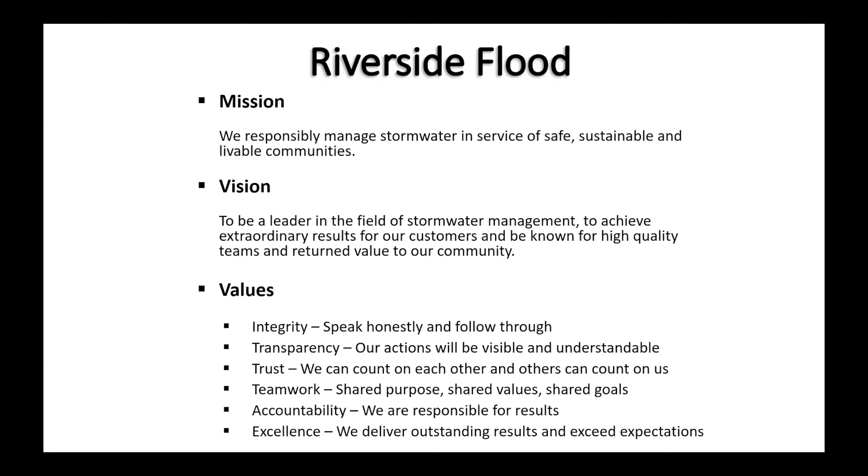And so just a little bit about our district. We were formed in 1945 after the floods of 1938. I'll show some pictures of those in a second. At our core we're a siloed agency that's responsible for managing stormwater. We're a flood control district.

Now, our flood control district only covers the western 2,700 square miles of Riverside County, roughly from Palm Springs west. The reason for that is there were some pretty significant floods in 1916 and 1918 that led to the formation of an earlier flood control district for the Coachella Valley. That earlier district ended up becoming integrated into the Coachella Valley Water District.

So folks who live out in the Coachella Valley area, their flood control needs are for the most part served by Coachella Valley Water District, with the exception of parts of Desert Hot Springs, Palm Springs, and Cathedral City.

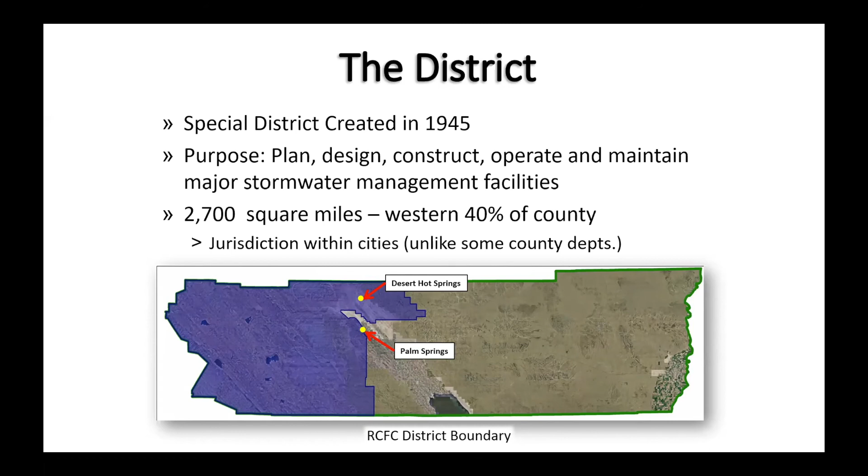Most people don't think of flooding in Riverside County; we're dry 360 days out of the year, some years more. But we do have bouts of very serious floods, often driven by atmospheric rivers. In 1938, we had one of the most significant floods of record, the Santa Ana River flood. In March, the Santa Ana River was flowing at the same rate as the Mississippi River at St. Louis. On a normal day, you can't even see the river, but in 1938, it looked just like the Mississippi, and it caused a lot of significant damage to our communities.

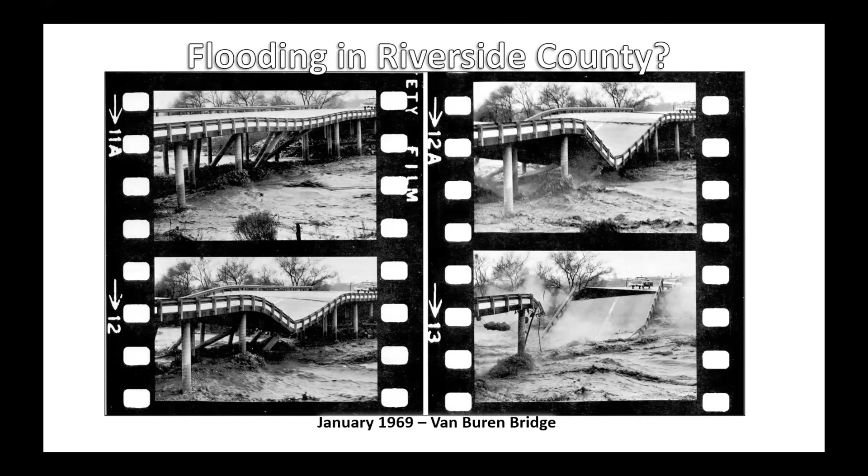In 1969, we had another fairly significant atmospheric river event come through the county, and that led to the floods of '69. These are some pretty dramatic pictures of the Van Buren Bridge, which was destroyed by those floodwaters on the Santa Ana River. About another 10 years later, we had the floods of 1980. That was another significant flooding year.

In 1993, we had another fairly significant storm. That storm focused more on the southwest portion of the county, and that led to flooding along Murrieta Creek and put parts of Old Town Temecula 3 feet underwater.

In 2005, we had another storm event come through, again focused on the Santa Ana watershed. That storm event was very interesting because the Santa Ana River ended up migrating. Most people think the Santa Ana River is a fairly stable river stream. Well, in 2005, the river ate a half-mile of riverbank and ended up taking out a home and almost took out a sewer line. These rivers, these systems, they go years and years being relatively quiet, relatively benign, but when we have these major floods, they can become active, and they do what rivers and streams do.

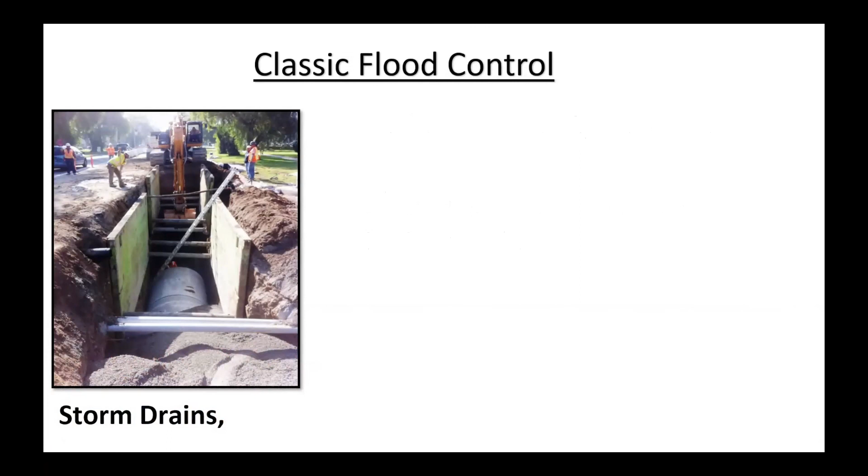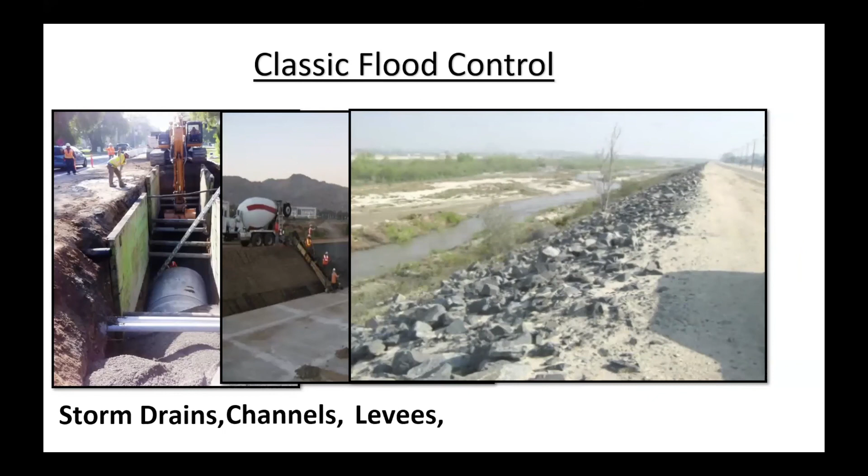The types of projects we build, and we're probably most well known for, are things like storm drains, concrete channels, and other forms of channels that you can see throughout the community. Levees like the Santa Ana River levees that you see on the edge of downtown Riverside or hiking Mount Rubidoux. And then dams. There's a number of dams in Riverside; sometimes you don't even know they're there. The Sycamore Dam, shown here, is at the intersection of Central and Chicago. It's nestled back from that intersection, but there's a very large dam there that protects a portion of Riverside County.

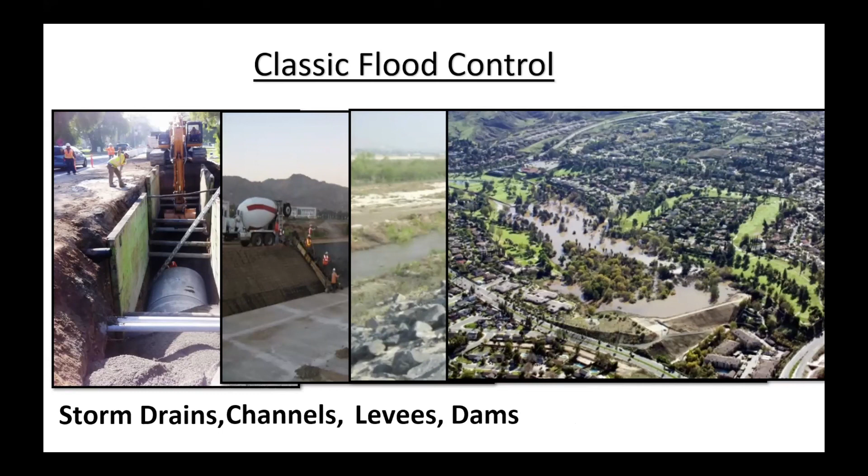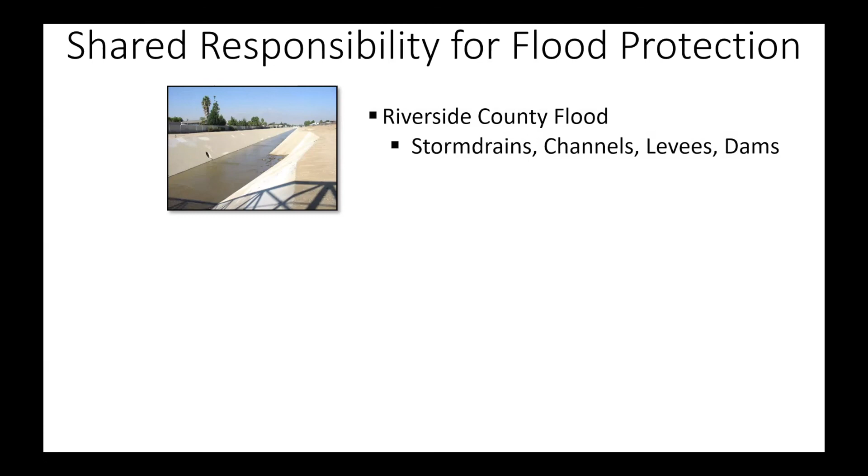One thing I always like to point out is people assume that since we are the flood control district, we are responsible for providing all of the flood protection to Western Riverside County, but that's really not true. Our role is to provide the large regional systems that protect our communities at a community level. So we build the big storm drains, the big dams, the big channels. The smaller infrastructure, like a culvert under a road, or the drainage interior to tracts when you see the catch basins, is typically managed by the local jurisdictions. The city and the county tend to maintain a lot of the smaller infrastructure as part of their road maintenance activities.

And then what really tends to surprise people is that they assume that if there's a natural stream, our flood control district will have control of that and own it and operate it.

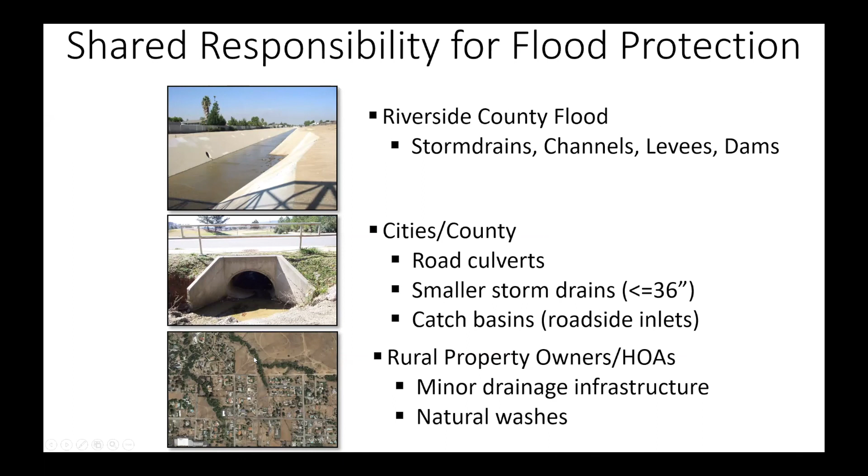So that's just a little background about who we are and what we do. What I want to talk about now is the evolution of our flood control district. When our district first started, we were very much about building efficient systems, and the most efficient system you can build is a concrete channel. And so concrete channels are very durable, they're very long lasting, but they're not the prettiest system, and they're not always compatible with our community's vision for how they want the community to look.

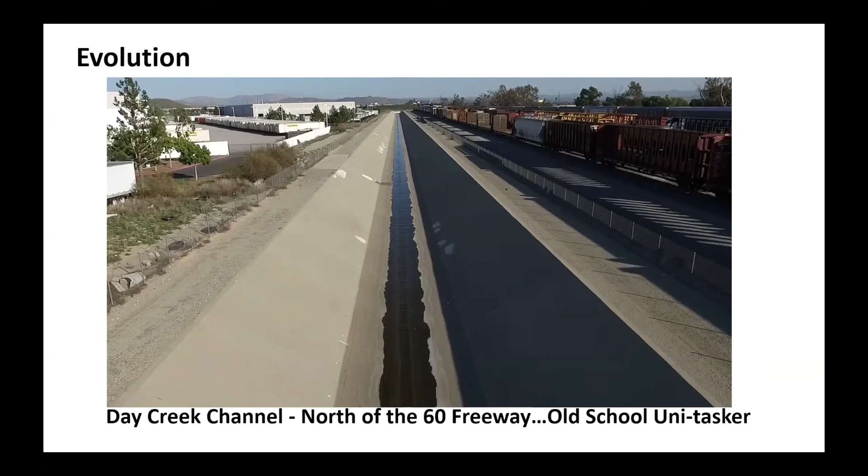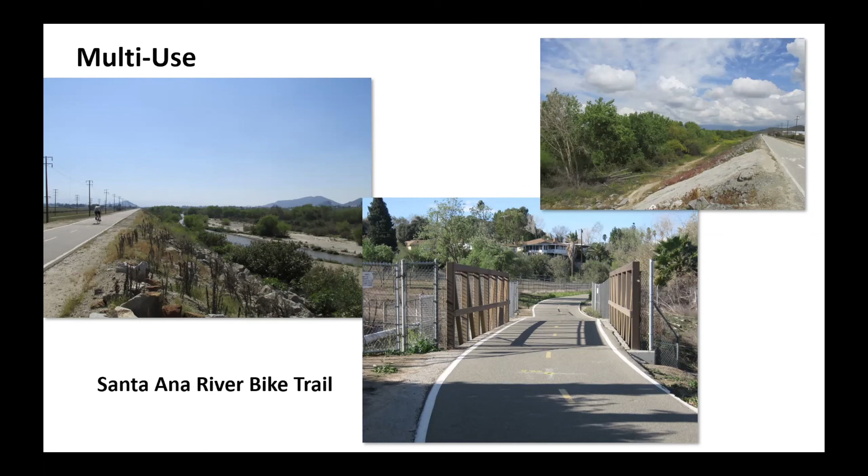And our efforts to promote a more multi-purpose, multi-benefit type of project to our community don't only include looking at greenbelt channels. We also are actively working with our cities and our parks district to integrate trails. So a lot of our channels have access roads. We're now working to convert those access roads to also serve as trails, like on the Santa Ana River Bike Trail. We also have basins that store water. We're working with the cities and the county to look for opportunities to have those basins serve as parks.

But in the old world, this would have just been a big brown hole in the ground. Now we're getting multiple benefits out of it. It's a park 350 or 360 days out of the year. And then somewhere between 5 and 15 days out of the year, it serves a flood control purpose. And that's a much better use of the land.

But when you're thinking about multi-purpose projects, you also have to know going into it that you actually want to integrate more than one purpose into the project. When we did the Harada project, we knew going into it that it was going to be a park. And so we designed the basin so it had flat side slopes so that people could go up and down them. We designed the basin so that the low flows would generally route around the park, and so it would minimize the impacts of flooding on the park when we didn't need to impact the park.

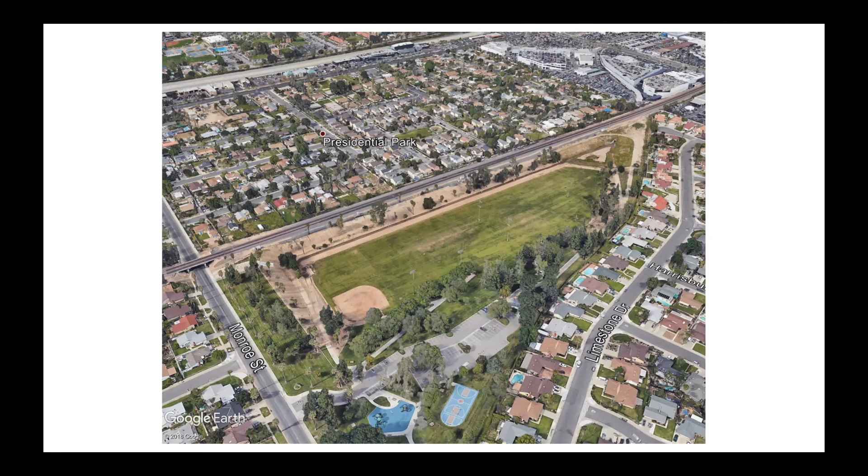When we try to retrofit uses in after the fact, it's much more challenging to be successful. And so this is a picture of another park in Riverside. It's the Don Derr Park off of Monroe. And this is also a flood control basin. But when it rains, there's no low flow management here because it was a retrofit.

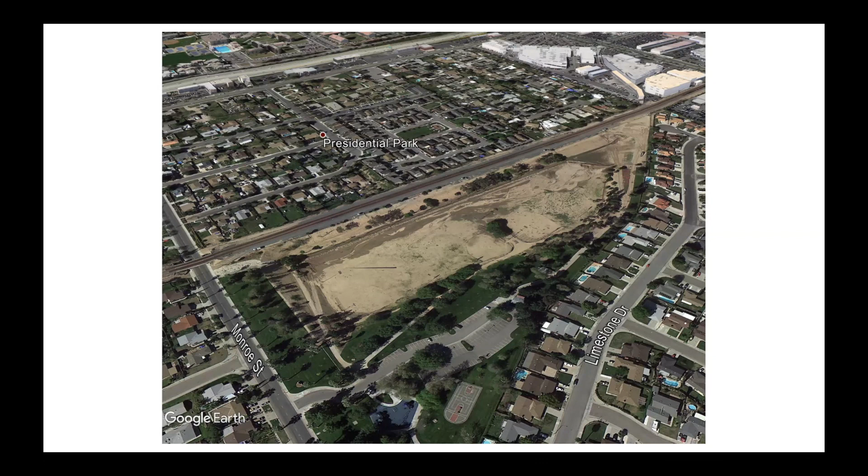And so here you get a lot of sediment that comes in from the upstream area, which is more agricultural. It's part of the old orange groves. And so this park is much harder to reset than the park in Eastvale, which was designed from the ground up to be a dual use facility.

We also work with our local water districts. Sometimes basins can serve different roles. If we're over a groundwater basin and we have good soils beneath the project that connect the surface to the groundwater, then we also look at trying to conserve stormwater. We can capture that stormwater and infiltrate it into the ground and basically store it in the groundwater basins for the water districts to use as part of their local supply. So we can enhance the local supply and reduce reliance on imported water.

And so the district also works with our local water districts when we're building new basins to say, hey, we're putting a basin in over here. Is there an opportunity to try to capture stormwater? Or maybe the water district has access to imported supplies that they can't always use in a given year. Sometimes they'll want to try to store the water here and then recharge it here because otherwise they lose it.

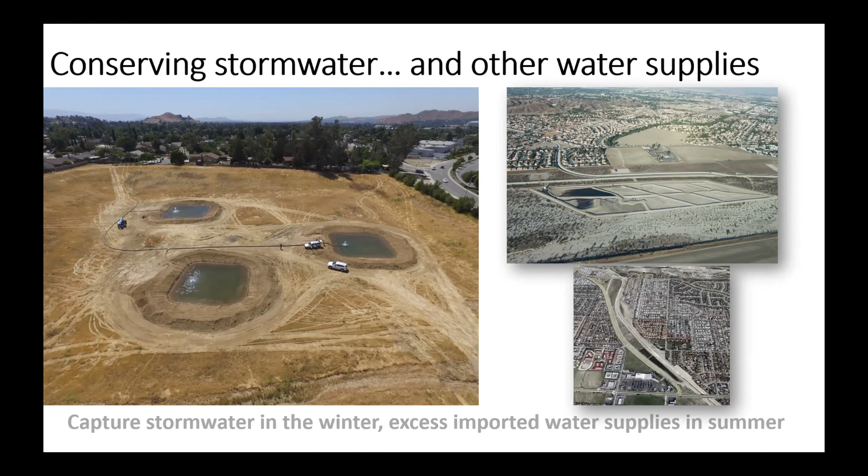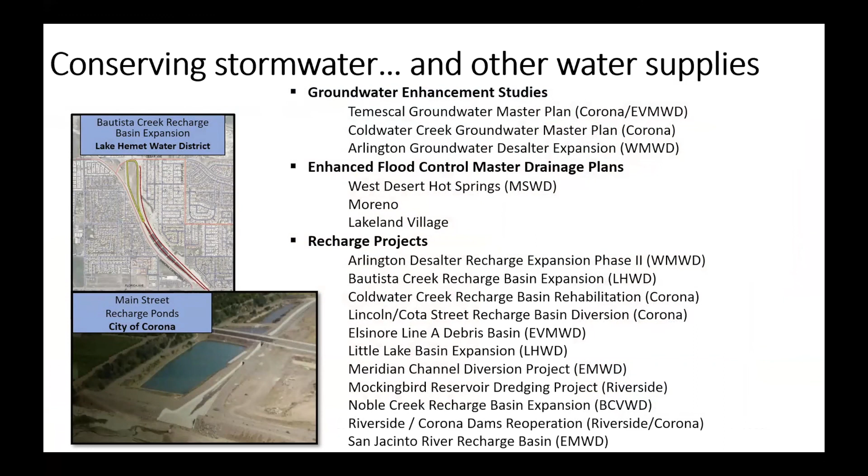So we work with the local water districts to also look for opportunities to use our facilities to enhance our local water supplies. And we have a number of projects we're working on. We work with Eastern, with Western, Lake Hemet Municipal Water District, Beaumont Cherry Valley, the cities of Corona and Riverside. We're always looking for ways to make sure that our projects can benefit the community beyond just their stormwater purpose, their intended primary purpose.

We also work with the cities and the counties to promote low impact development. Low impact development projects basically are a way of dealing with new land use development. And so if you're going to do a new residential development, classically there's a lot of impervious area, there's a lot of asphalt, there could be a lot of parking. But if you think about it a different way, there's a way to have that development function more like nature by using things like porous pavements that allow the water to seep through the pavement instead of running off the pavement, by integrating green belts into the community.

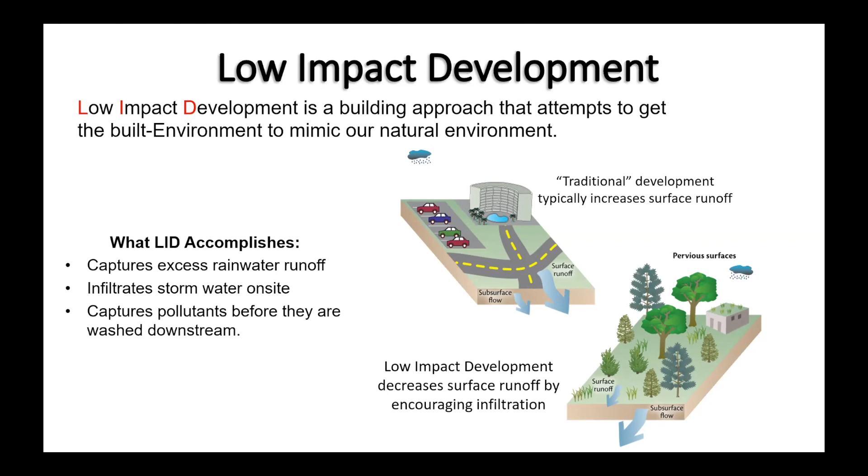And so we work with our local water agencies to look for ways to make our developments more environmentally friendly as well, and share standards with them so that they can pursue that low impact development design standard successfully if they choose. And then lastly, I just wanted to talk very quickly about homeless encampments.

Homeless, I don't know if they like to live, but they find it convenient to live in our rivers, like the Santa Ana River, and in our storm drains. And part of that is they're out of sight, and so they're generally not in the face of the community as much. So they get hassled less in these locations. And it also gives them some privacy and allows them to do certain things that maybe they couldn't do if they were living more in the core of the city.

And those wastes are in our waterways and in areas that are trying to preserve and protect endangered species, or they're in areas where they're really putting themselves at risk by living in an area that's known to flood. And so one of the things we're working on now is trying to partner with our local land use agencies, trying to partner with the sheriff and code enforcement and others to try to find a better way to manage homeless. And the county's really taking a leadership role on that.